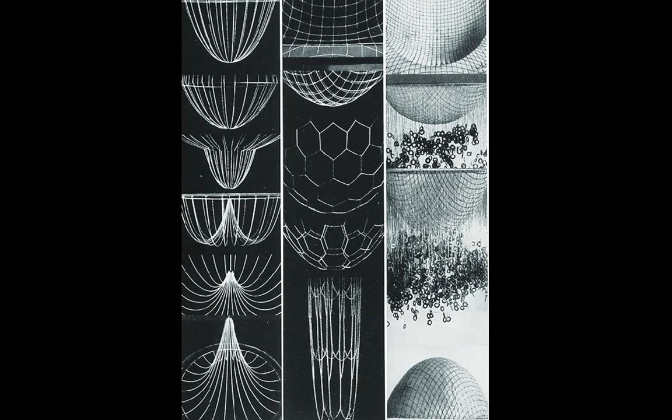Drawings by Frei Otto. He explored in so many ways the complexities of nature as applied to structural design. He was not afraid of randomness. He was not afraid of unconventional structures. In fact, he promoted them.

Procedural modeling tool, Frei Otto Attractor. If any of you is very interested in structures and unconventional structures, Frei Otto is a gold mine.

Because, you see, he was actually trying to discover the principles of nature. Unafraid to assume the spiral, unafraid of even assuming some kind of structural turbulence, and very light structures as well, not heavy. Like, look here, it's about the labyrinth, it's about the knot, it's about the weaving in.

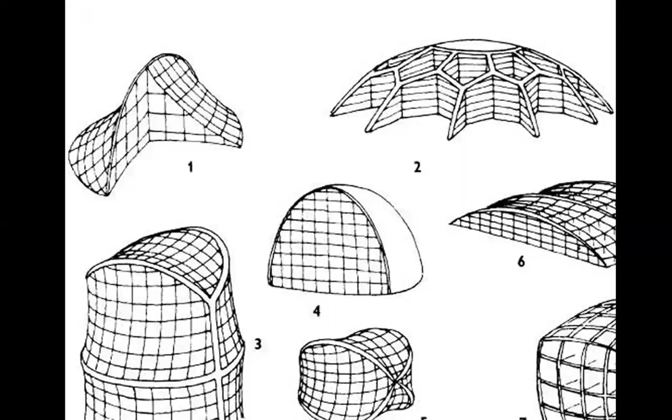Less predictable ways, about textile work. Yes, it's about embroidering and weaving structurally. So the ornament becomes structure and the structure becomes ornament. A remarkable engineer architect. And yes, he did receive the Pritzker Prize just days before he died.

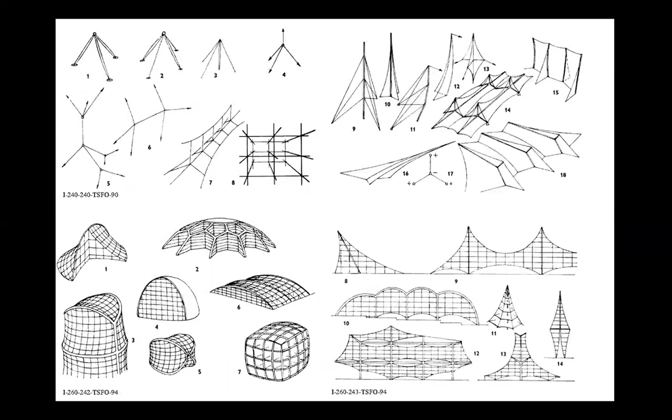Occupying and connecting, thoughts on territories and spheres of influence with particular reference to human settlement. Rather long title, but it shows his preoccupations for something that went beyond structure in a conventional sense. Occupying and connecting. Terrain vague, networks, cities and trees. A beautiful title. I mean, how many engineers of this world would talk about a terrain vague? Vague. The very word is very provocative for an engineer.

Vague, because engineers work with certitudes, not with vagueness, but not Frei Otto. Networks, cities, and trees. Maybe these days we should say trees, networks, and cities. The trees should come first. What do we see here? Well, we see, in my opinion, a quest for freedom within structure.

In other words, assuming instability in the field of stability. Structure is supposed to be stable. But if you can incorporate a certain level of instability within structure, all for the better. Look here, this is like an osmotic, spontaneous, almost ad hoc urbanism.

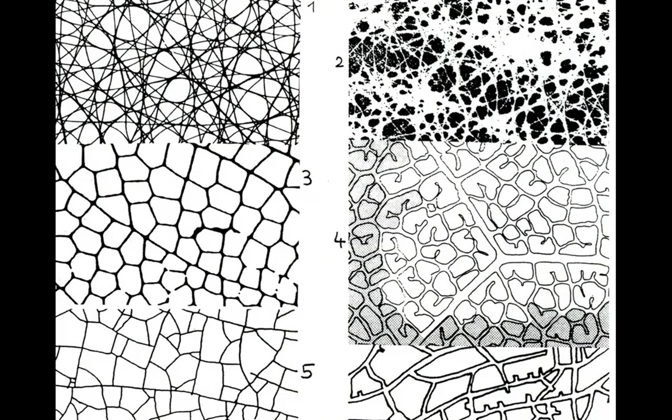If you can apply what nature has, the relationships between cells and all kinds of nodes in the natural phenomena, and apply it to urbanism, I think we would have more humane cities. Unfortunately, we are still governed by Cartesianism in excessive forms. This is what Frei Otto was exploring, tissues, that they are urban or

connecting to an architectural object. He was exploring tissues. Frei Otto presented in Occupying and Connecting a theory about the phenomena of urban networks as self-organized systems, surfaces and paths, occupations, and territories expansion.

All these spontaneous structures grow through two basic processes that organize all natural and humanized spaces: occupation and connection, governed by laws of attraction, repulsion, or expansion, contraction. They present emergence and self-organization behavior akin to physical processes in natural patterns.

But what do we see here? We see a concern with the opposites: attraction, repulsion, or expansion, contraction. And I think if we assume the two sides of the coin, so to speak, the convex and the concave, the attractor and the repulsive, the expansion and the contraction, we are closer to what true reality is about.

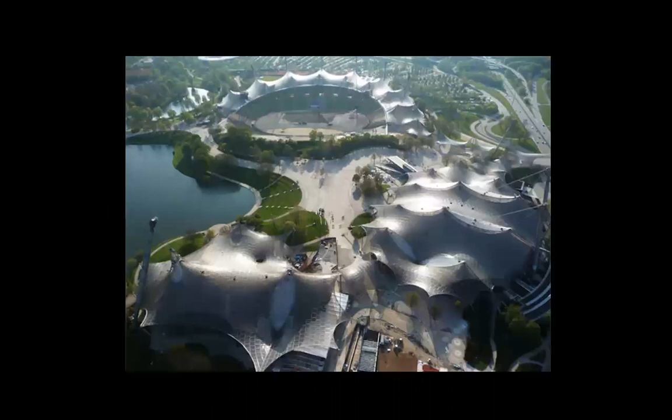The cloud-like and innovative structure was a striking departure from the harsh and authoritarian appearance of previous roofing structures and helped present a new, lighter face of Germany to the world. Covered in acrylic glass panels, the suspended membrane delicately floats above the stadium and maintains views out towards the surrounding landscape. And here it is, the magnificent work showing the ingenuity, the creativity of human beings beyond the misery, the tragic misery of the Second World War.

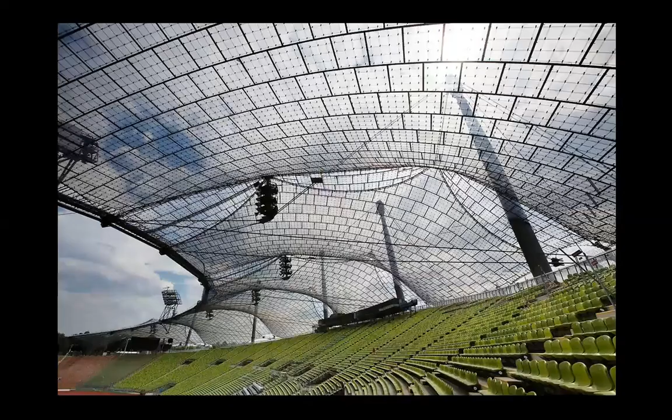Thus, Germany showed the positive side of its spirit. And Frei Otto illustrated it magnificently with these stadiums. He obviously was inspired by nature, maybe even by the wings of the butterfly.

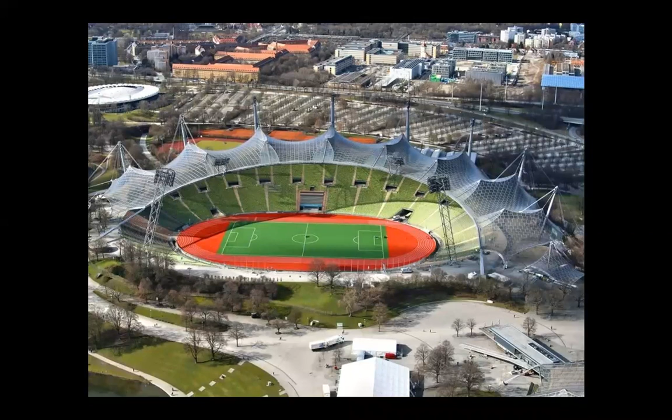What makes these works interesting is exactly the work of Frei Otto, the coverings, so lightweight. He was no doubt an inspiring man.

I think in that intertwining of the two hands, the one of the architect and the one of the engineer, as Le Corbusier sketched, in that collaboration, there is a source of an enhanced creativity. The engineer is needed, the architect is needed, and if they could collaborate, great things could come into being.

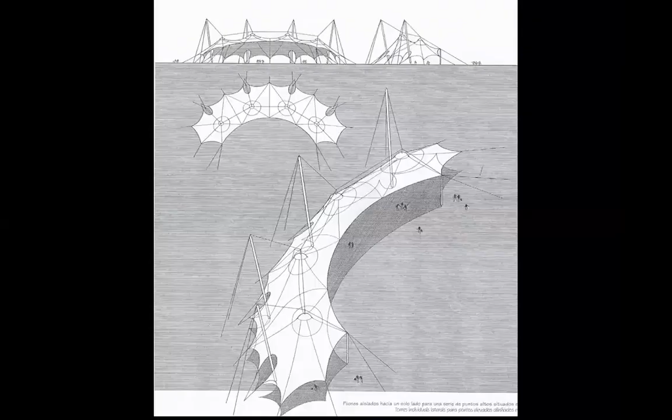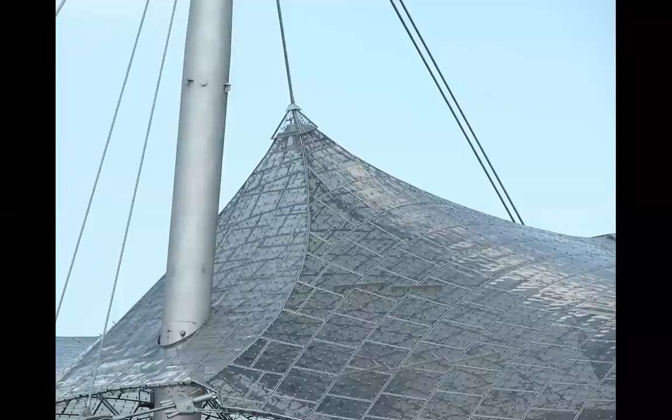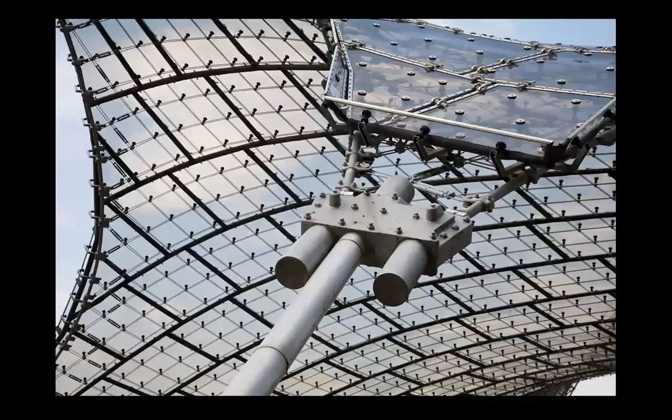So the rigidity of such a mega structure, a big stadium, is softened and made graceful by the work of Frei Otto here. Otherwise, these giant stadiums could be indeed very static and very rigid looking and intimidatingly so. But he found a way to make them actually light. Great engineering and great execution. We are in Germany after all.

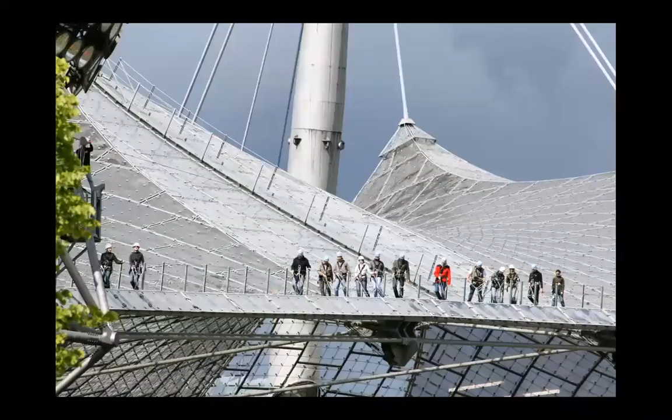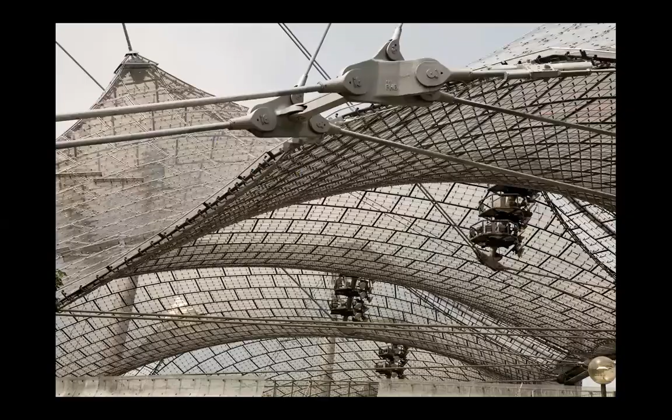Frei Otto. Did he think when he made these works that one day he will receive the Pritzker Prize in architecture? Probably not.

Now, the roof of the Multihalle, the multi-purpose hall in Mannheim in Germany, completed in 1975 over the course of 5 years. The Multihalle is topped by a double curvature wooden grid shell structure designed by Frei Otto, Carl Mutschler, and Joachim Langner. The large span grid shell was made for a horticultural exhibition in Mannheim, Germany, and covers an area of nearly 9,500 square meters. Listed as a historical cultural monument since 1998, this timber lattice self-supporting roof structure allows diffused light into the building and creates a sense of weightlessness inside.

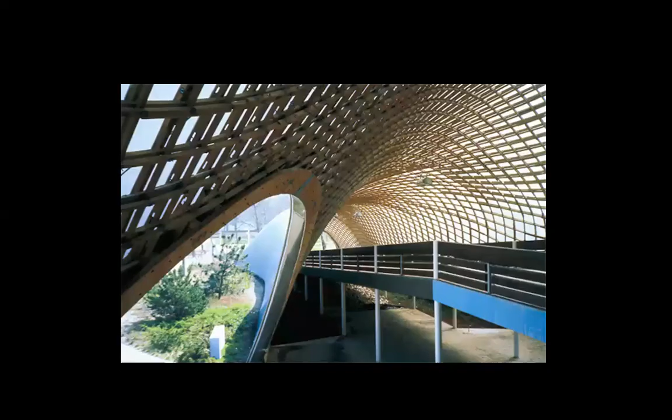And here it is. This one as well, magnificently woven. He was a master of light structures.

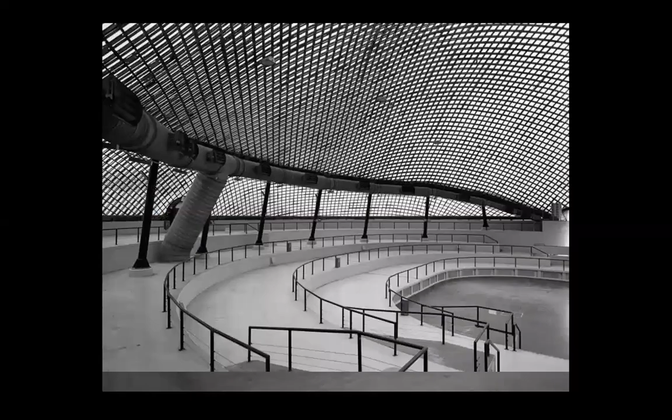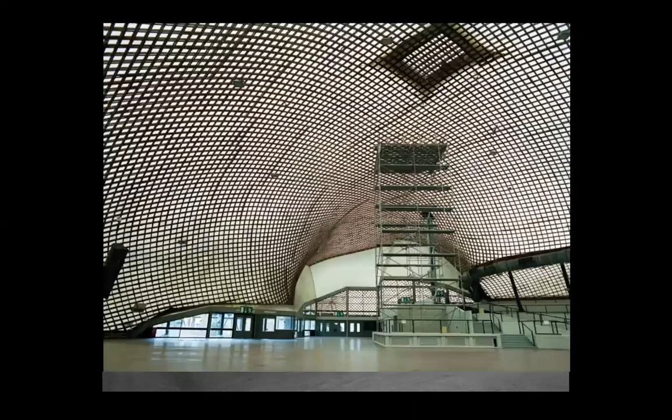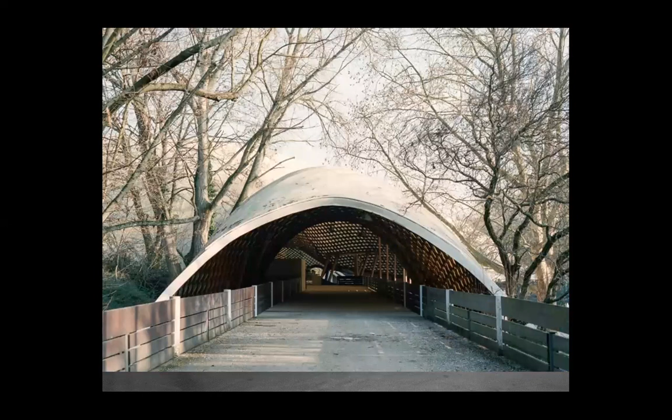Like in the case of the stadium in Munich, here also what's impressive is the roofing. Organic, lightweight. Nature herself probably loves such works, which, despite the fact that they use also concrete here and there, in their lightness probably please Mother Nature.

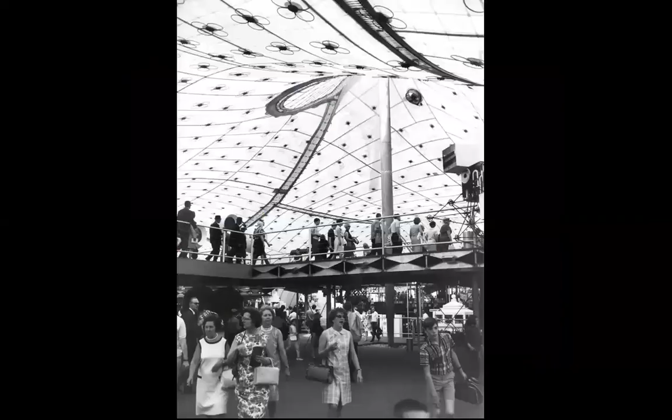So here is the pavilion of the Federal Republic of Germany in Montreal, Quebec, in Canada. And yes, the many years dedicated to finding the most graceful and the most lightweight kind of structure for roofing shows here again its fruits, its results. Very elegant, doing the job in a graceful way.

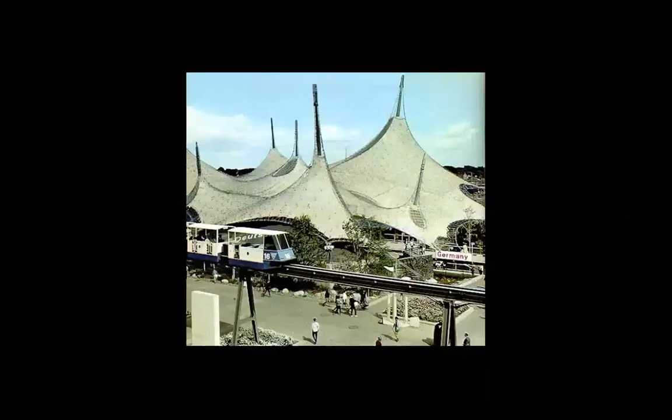This image in itself is like an artwork, I would say. It deserves to be put on the wall, on the glass. The Japan Paper Pavilion at Expo 2000 in Hanover, Germany.

Frei Otto designed the Japan Pavilion for Expo 2000 in collaboration with Shigeru Ban, another Pritzker Prize laureate, the 2014 winner of the Pritzker. Constructed entirely from paper, the grid shell pavilion is made up of recyclable paper tubes without joints. The airy tunnel arch measures 73 meters long and 25 meters wide. Honeycomb boards were used as partitions in the interior, and here it is.

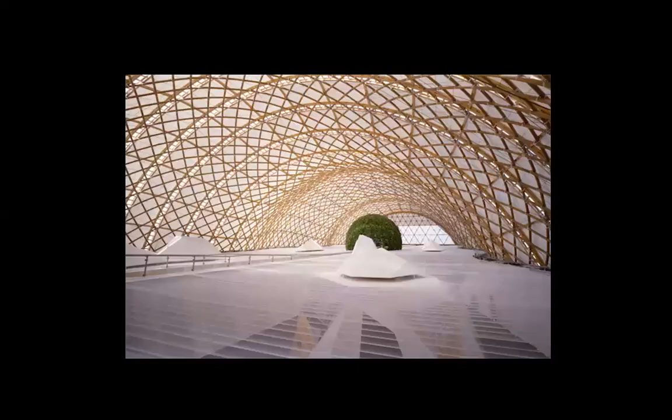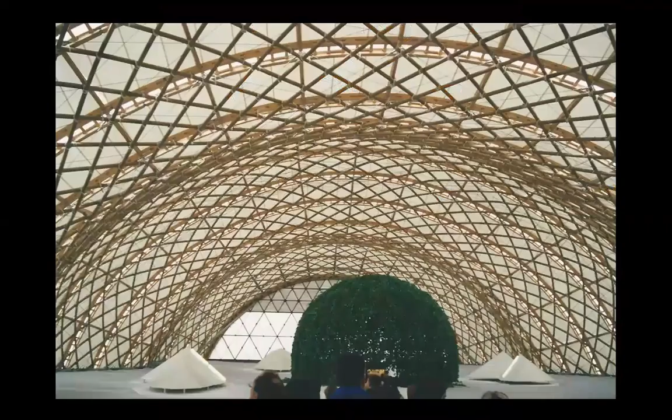I personally like more the works that Frei Otto did without Shigeru Ban. Shigeru Ban has some good works, especially in the field of humanitarian architectural works. He was great in that field, but sometimes I think some of his structures without social concerns are a little bit, should I say, a little bit predictable. But he was an important architect in today's world.

Shigeru Ban, another Japanese who astonishes us after so many others. It is the country which has the largest number of Pritzker prizes, Japan.

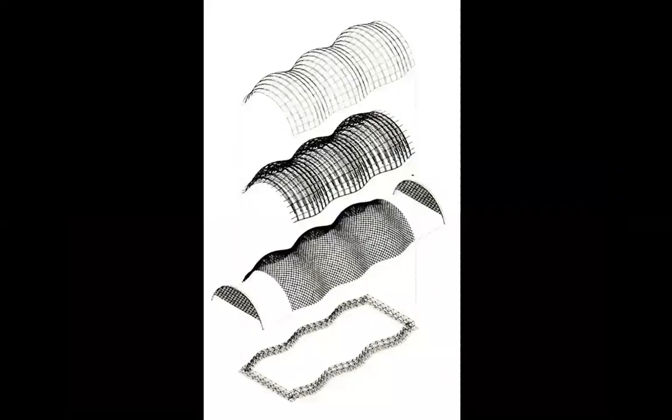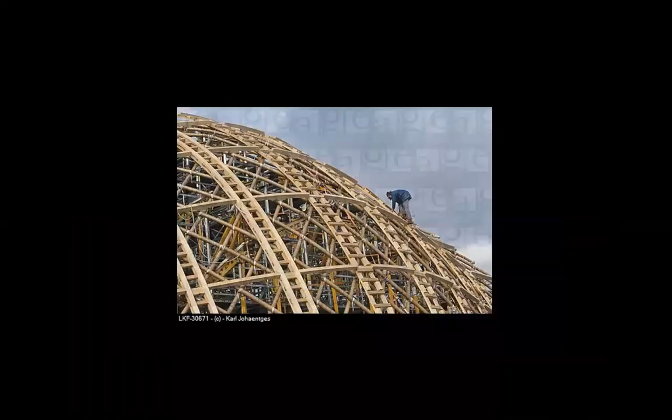Again, a woven structure, textile work, if I can call it so. Impeccably brought together.

Shigeru Ban and Frei Otto. The diplomatic club Heart tent in Riyadh, Saudi Arabia, completed in 1980, serves as the centerpiece to the interior garden of Riyadh's diplomatic quarter.

The beautiful canopy is made from 2,028 8-millimeter, less than 1 centimeter thick, tiles of stained glass, painted with colorful and traditional patterns created by Bettina Otto, Frei Otto's daughter. The canopy helps protect visitors from the powerful sun and is made from cable net construction.

And here it is, almost fantastic, almost psychedelic. Father and daughter. I don't think they did all the building there, but just that part with the tent. An interesting work in the desert.

A German architect engineer and his daughter. The Munich Zoo Aviary: in collaboration with those two people, Frei Otto designed a large aviary for the Munich Hellabrunn, the world's first geo zoo located in Munich, Germany. The innovative thin stainless steel mesh canopy creates a cage-free like environment for the animals.

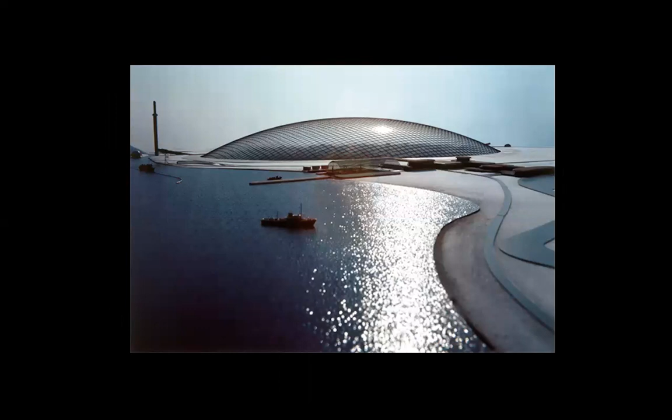Now, a very optimistic proposal. This text was written, who knows when. Maybe today we have less reason for such optimism, but at that time, I guess it was still, to an extent, legitimate.

Frei Otto's proposal to house 40,000 people under a 2-kilometer dome in the Arctic Circle reflected the zeitgeist of the 1970s: a concern about the ecological future combined with the promise of a better tomorrow.

The beginning of the 1970s was a heady time for architecture. The oil and energy crises were still to hit. Postmodernism was still a marginal heresy practiced by cranks, and despite maybe a sense of boredom at the same old concrete, the tide was yet to fully turn against state architecture.

The overwhelming impression was one of accelerating development. Humans were on the moon, new technologies such as computing and new materials such as plastics were forging ahead, and desire for social change was bubbling over.

There was every reason to think that this new movement, in which governments planned and built entire new cities for thousands of people, would continue and progress. Well, did it happen? Not necessarily. But the longing for a better world existed.

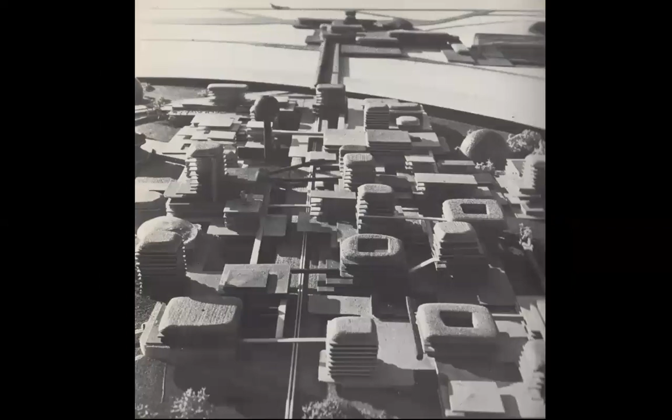Here I show some things from what was supposed to happen under the giant dome, 2 kilometers in diameter. That's huge. As I said, Buckminster Fuller also did something similar, a similar proposal for Manhattan.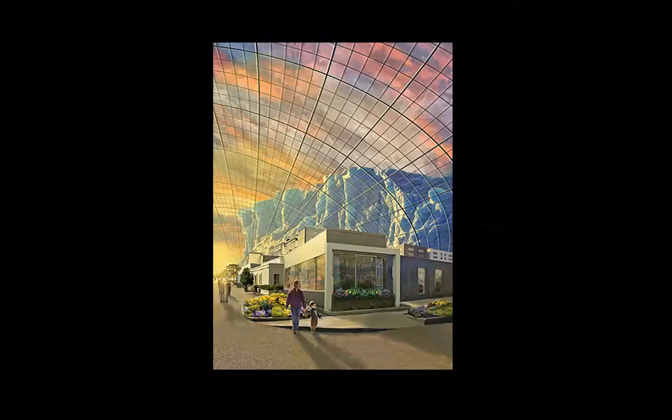I personally don't think living underneath this canopy, this giant dome, no matter how light, is so-called conceptually very inspiring, because we are still separated from the outside, from nature, only mimicking that we are connected with it, but we are still seduced by the paraphernalia of protection, as Rem Koolhaas would call it.